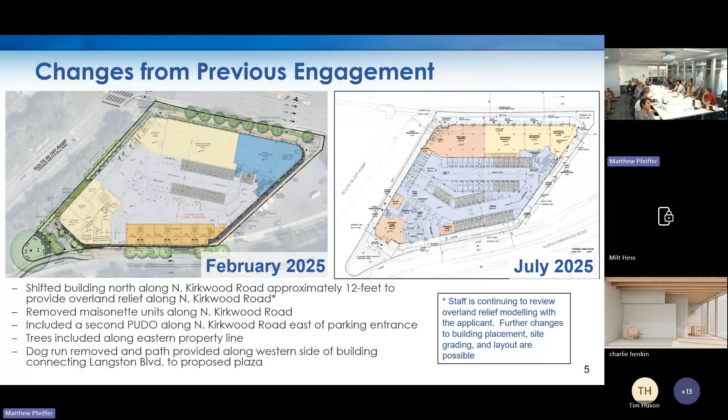But some other changes the applicant has made at this point: they've shifted the building north on Kirkwood about 12 feet to provide overland relief, removed the maisonette units as a result of that shift, and provided a second pickup drop-off lay-by area along Kirkwood Road. They've also included trees along the eastern property line with a pawn shop in response to staff comments, removed the dog run on the western side of the site, and are now providing a path that links Langston Boulevard to the proposed plaza.

The Langston Boulevard area plan was policy formation. It developed and adopted policy guidance on topics like land use, zoning, building height, building design and architecture, open space, transportation, and a variety of other topics. That is now adopted plan guidance, and now we are in the special exception site plan phase, which is implementation of that plan guidance.

In plan implementation, we are reviewing a fully engineered plan for redeveloping a site, and identifying ways in which it conforms to the guidance and ways in which it may deviate from the guidance and other applicable zoning, building code, and other things of that nature. Part of the job of SPRC is to discuss whether those deviations are appropriate or justified, and the same with zoning modifications that may be needed - do they make sense, are they consistent with policy or not.

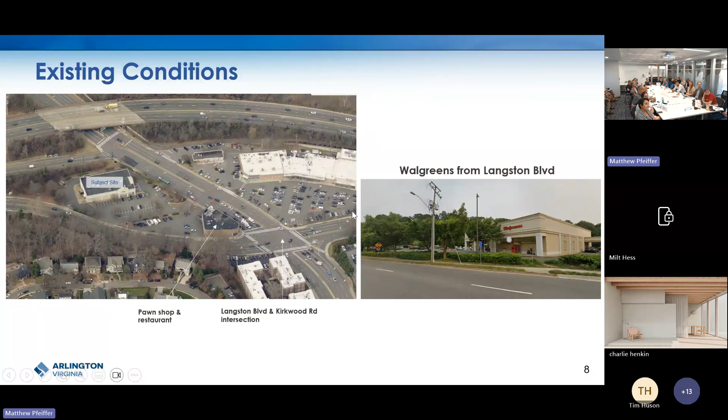Here are the statistics, which are actually updated: a total of 310 units. We've split, from our density calculation, the site into a residential site area and commercial site area. For the residential site area, under CO 2.5 zoning, they have about 185 units base density and are requesting 125 additional units. In terms of commercial density, they are meeting the 2.5, which comes out to about 8,260 square feet of retail GFA.

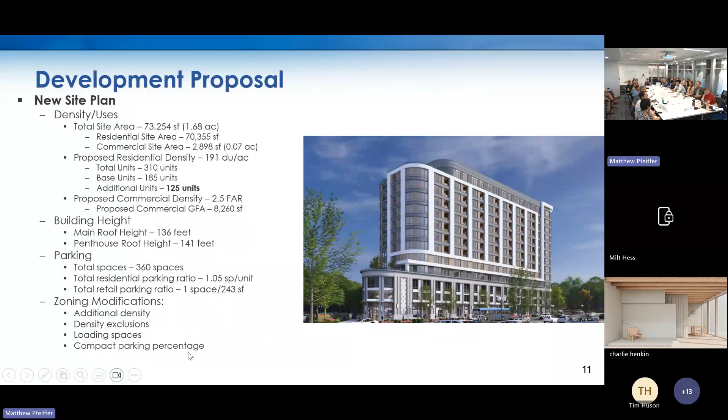The building height is 136 feet, with penthouse height at 141 feet. Penthouse roofs, as they are mechanical, do not count as building height, but we're giving you the statistic anyway. They're proposing 1.05 spaces per unit for residential parking ratio, and about 1 space per 243 square feet for retail parking ratio. They are asking for modifications for additional density exclusions and loading spaces - I have another typo, I apologize. I believe they no longer need a compact parking percentage modification, so that is a change.

So on the discussion topics, I'm going to go over some guidance from the Langston Boulevard area plan, talk about outstanding staff comments, and mention some of the feedback we heard in the online engagement.

The Langston Boulevard area plan identifies this area as a mixed-use hub, where we're expecting new high-density development. A major land use goal is to transform Langston Boulevard into a vibrant, green, multimodal Main Street corridor through expanded land use and density that will support new households, shops, and job opportunities.

The plan identifies this site as a recommended change to the GLUP to medium office apartment hotel, consistent with what the applicant has applied for. CO 2.5 is the zoning district that implements that designation, so the proposed GLUP designation and rezoning is consistent with the Langston Boulevard plan.

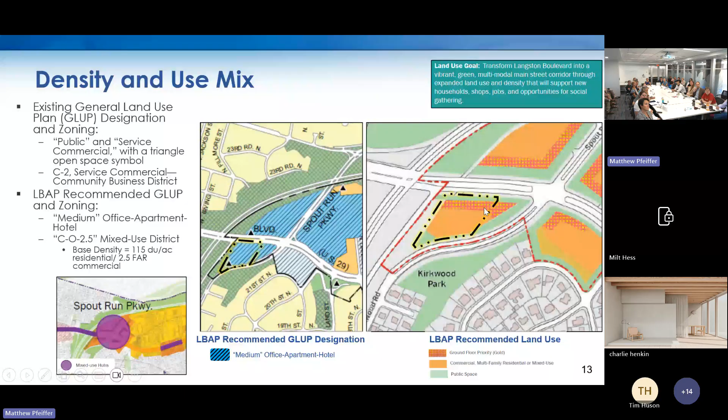In terms of specific land use, the site is recommended for mixed use with retail frontage along Langston. This graphic shows approximately the area where the applicant is proposing retail or retail-equivalent use, and they are in general conformance with the land use recommendations of the plan.

I wanted to pause there and talk about some online engagement feedback we received. SPRC members generally expressed some disappointment with the lack of consolidation with the pawn shop site. They did support ground floor retail and general support for the proposed density.

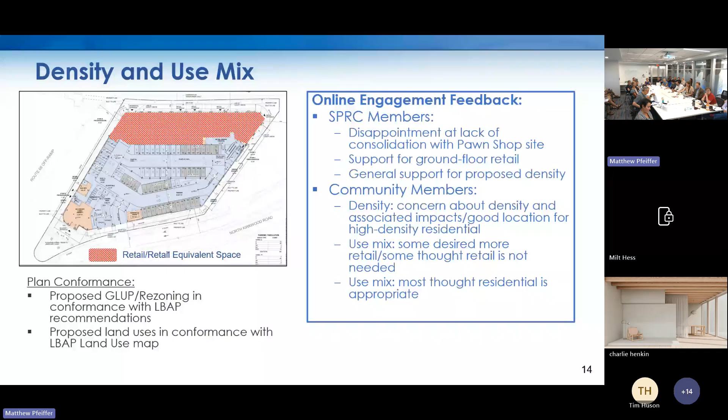Community member feedback was much more mixed. About half had concerns about the density and associated impacts, while the other half thought this was a good location for high density residential. On the use mix, some thought there should be more retail, others thought retail wasn't needed, but almost everybody thought residential was an appropriate land use here.

On site design and layout, this snippet is from the concept plan map for Area 5 West. You can see the general contemplated layout of the site here.

A note about illustrative layout drawings and sector plans generally: they represent one iteration of the possible build out of the site. They are not prescriptive. Other recommendations or guidelines in the plan are generally more prescriptive of what we're looking for in terms of guidance.

We'll look at this on the next graphic. This is generally what the applicant is proposing. In terms of some other layout features...

Their consolidation with the pawn shop site was contemplated here, but obviously that wasn't able to occur. We do have a recommendation for a plaza/park on the southern side of the site, seen here in bullet B. There's also a recommendation for a 50-foot greenway along the Kirkwood Drive frontage for overland relief, which we'll talk much more about at the next meeting.

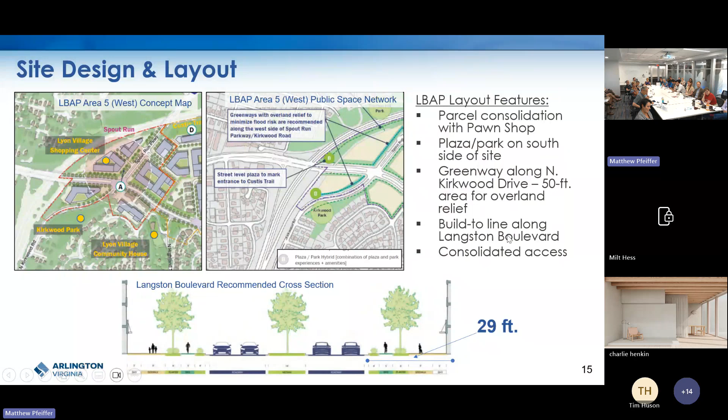There's a build-to line along Langston Boulevard which, as you can see from the recommended cross section, is about 29 feet, and recommendations for consolidated access points. This is what the applicant is proposing, generally in line with the planned contemplated build out of the site, with the exception that they were not able to consolidate the pawn shop site.

Loading and parking access are off of Kirkwood, consistent with plan guidance for these services to be located not on Langston. They do have the park on the southern side of the site, and the main building entrance, the pedestrian entrance, is off of Langston.

Going back to online engagement feedback, SPRC members generally expressed satisfaction with the proposed site layout, although we did hear that some thought the building lobby should be on North Kirkwood Road, or generally not at this corner. There was also some concern expressed about the high lot coverage.

Community members felt the site design was generally appropriate, although most felt the plaza was too small. They also thought there should be wider setbacks on Kirkwood and on the western side of the site abutting I-66. Some folks were appreciative of the pathway along the western side of the building.

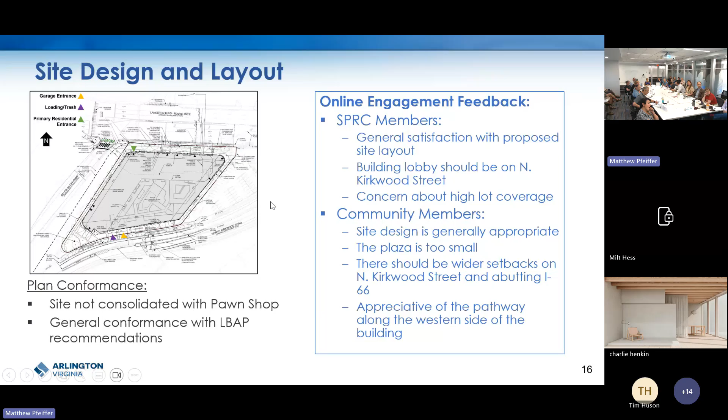There is one staff comment I wanted to raise, somewhat related to open space but also to site design. One change I mentioned is that the applicant is no longer proposing the dog run in this area, and instead they've provided a pathway along the side of the site connecting Langston Boulevard to the plaza. This consists of about a 5-foot sidewalk and a 5-foot planting strip.

We have some comments that are outstanding that we're working with the developer on, related to how comfortable and accessible this pathway will be. We are appreciative of the plantings, which do contribute to their tree canopy targets. However, we're somewhat concerned that these trees could serve to block off this pathway, and also concerned about access. There's a door access here, and just what that does to the ability of people to get through there, understanding that it's unlikely the building would be able to shift anymore.

What can we do with the space that we have? Also, is there ability to provide some more wayfinding or other visual or design cues to let people know that there is a pathway here that can get you through the block? So that's an outstanding comment that we have.

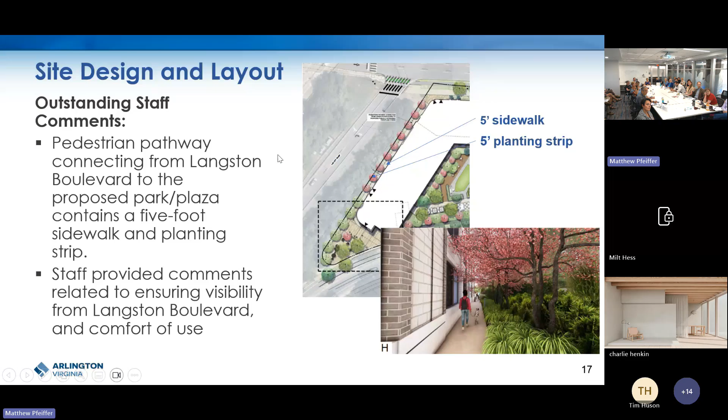The Langston Boulevard Area Plan identifies 12 stories as being up to a maximum of 136 feet. The building height guidance in the plan is somewhat nuanced in that it provides both a maximum number of stories as well as a maximum number of feet, and those two guidelines are supposed to work together. I think there is some degree of acknowledgement that there's flexibility built in for accommodating the desired mix of uses as well as specific site conditions.

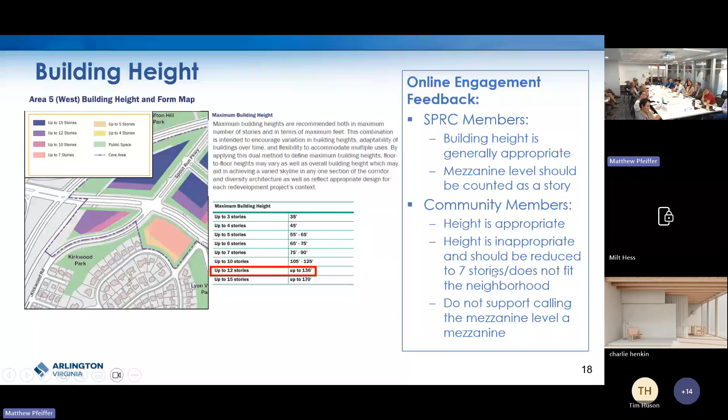Since it's on the slide, I'll mention this now. Some of the feedback we received at the online engagement relates to what I'll talk about in the next slide. The SPRC members largely felt that the building height proposed is generally appropriate, although there was a mezzanine level they felt should be counted as an extra story. The community members were much more mixed. Some felt the height was appropriate given the location. Others felt it was not appropriate and should be reduced to 7 stories, or does not fit the neighborhood. Again, we heard that folks didn't want the mezzanine level counted as a story. So let's get into that issue.

Unfortunately, our zoning ordinance does not define mezzanine or what a mezzanine is, so it's somewhat subject to interpretation. Generally, in other places, we've applied a two-thirds of the floor standard, but that's not codified anywhere in the zoning ordinance - that's just what we've done in practice. That's really been applied in Clarendon, where it's much more related to the density and how density is calculated. If we did count this as a story, which I'm not saying we are, but if we were to, this would make this a 13-story building.

As I mentioned earlier, the Langston Boulevard Area Plan height guidance recommends both the total maximum number of feet as well as stories, and those two things are supposed to work together. I will say that they are meeting the 136-foot standard, so they are in conformance with the plan guidance on the absolute number of feet in terms of height. I will also mention that if the applicant were to remove this mezzanine level completely, it would result in the loss of parking.

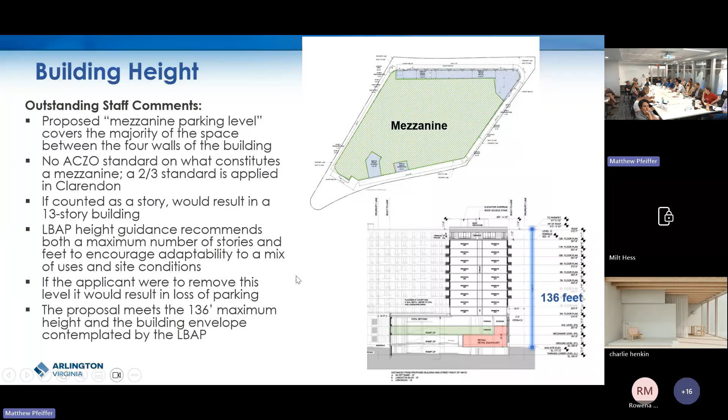So the applicant is providing a 2-foot step back above the base here. Given the width, I think the intent of having those step backs is to ensure adequate light and air access at the ground level. I think given the width of Langston Boulevard, it's not really a concern of staff at this juncture. However, I think we do want to see other solutions in terms of architectural design, materials, or sculpting elements that could be introduced to get closer to the spirit of having this facade sculpt a little bit more from Langston Boulevard.

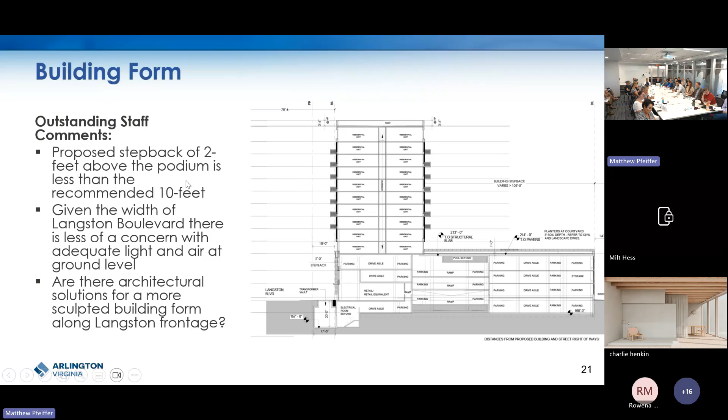I'm going to backtrack and talk about what we heard from the online engagement. The majority comment from SPRC members was just wanting a little bit more information as to what the applicant is proposing in this regard. From community members, the majority felt that the applicant should meet the required step backs and that the building is too bulky. A minority thought the step backs are fine, and some people thought they're not needed at all.

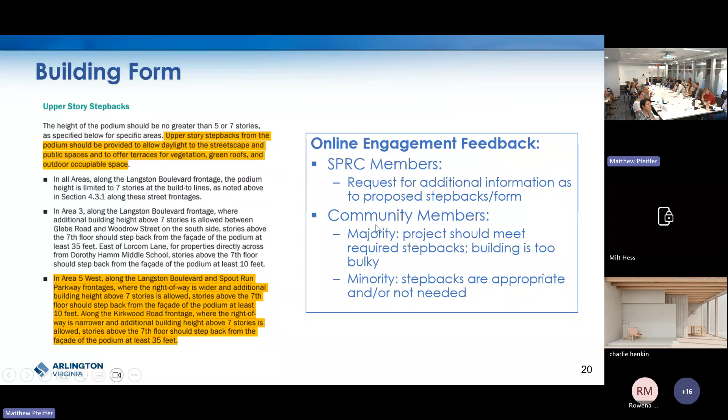Okay, architecture. So again, I've clipped some guidance here from the area plan. This has some less specific but more general guidance on good architectural design. I'm going to skip forward to an outstanding staff comment that we have. So the applicant, as a result of shifting their building 12 feet back, did have to remove those maisonette units, so we don't have those anymore along the Kirkwood Road frontage. That was one aspect of the plan that was received very positively. I think everybody liked the architecture a lot along that frontage.

So what we have now is, unfortunately, the parking garage, due to site constraints, is all along the Kirkwood frontage. So we just have some comments here. There's a high number of louvers. Again, what additional design elements or screening could be introduced to improve this facade, make it look a little bit more inviting, a little bit less like a parking garage.

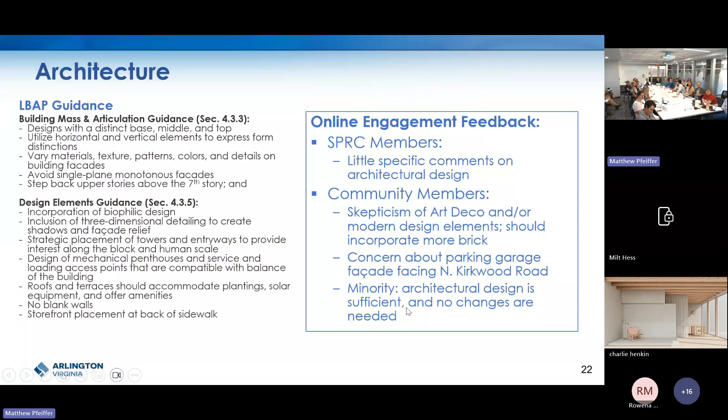When we go back and talk about online engagement, there wasn't much specific commentary from SPRC members on architectural design. Community members expressed skepticism about some of the more modern elements as well as the Art Deco elements of the design. There was some concern about the parking garage facade — and again, a typo, sorry. Back then, the parking garage was facing the eastern lot line against the pawn shop; now it is facing Kirkwood Road. A minority thought the architectural design was fine and that no changes were needed.

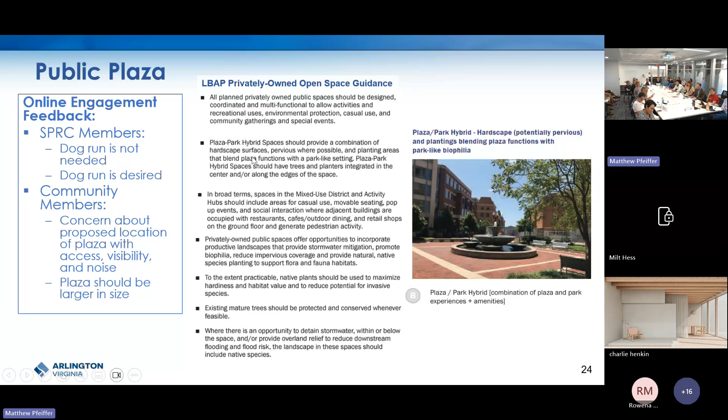So what we're really talking about here is a separate guideline from the Langston Boulevard area plan related to tree canopy. For this target, we do count trees that are maybe not on the applicant's property, but on their frontage, and also trees that are on elevated plazas.

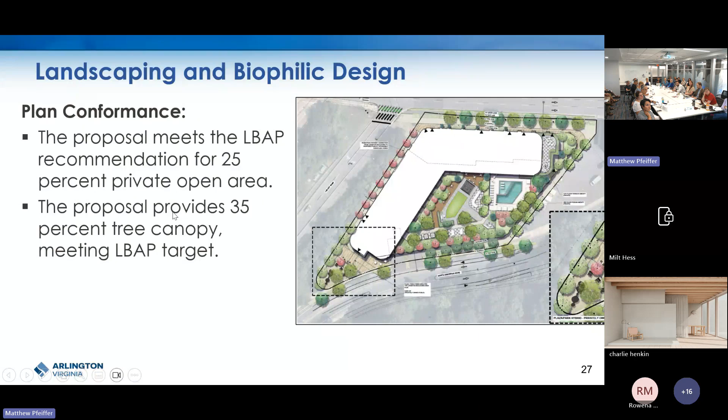So I will stop here and turn it over to the applicant.

Great, thank you, Matt. Are you going to bring up the presentation on yours, or should I? If you could share your screen, I will stop sharing. I will try that. There was a lag at Planning Commission a week or two ago, but yeah, if need be, I can pull this up.

It's happening the other day. So, let me see if I can get to... There we go. Let me go ahead and share my screen again. Last time, no. All right, I think that worked.

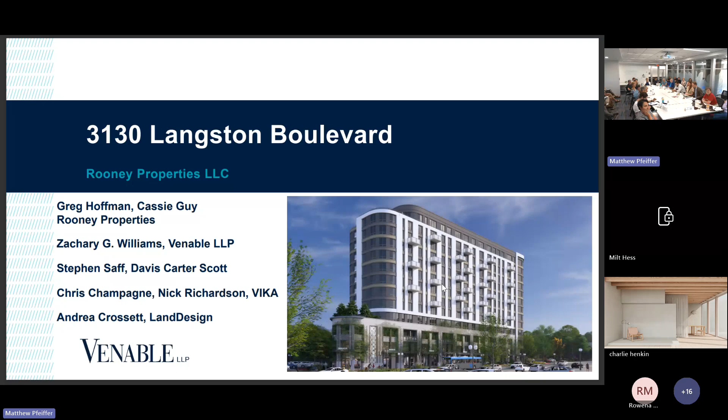I just want to mention that Steve and Andrea - that's a good point - two of our members who will be presenting tonight, Steve Saff with DCS and Andrea Crossett with LandDesign, are participating online. So they're on right now. I just want to make sure that was clear.

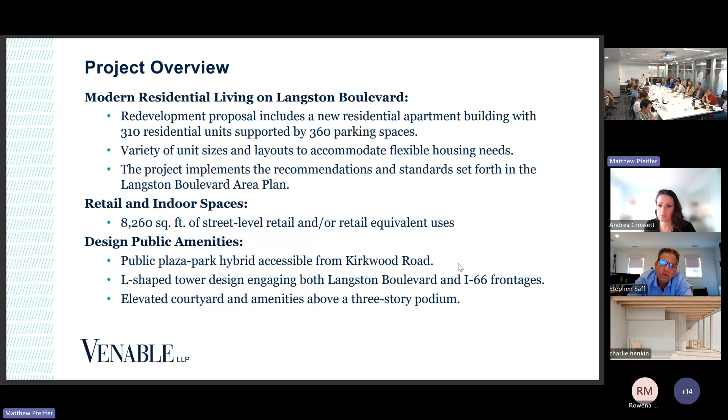So Matt did a great job with the project overview and presentation. As he mentioned, the project in its current form is proposing a new residential apartment building with 310 residential units and 360 parking spaces. The building will have a variety of unit sizes and layouts across 12 stories. Overall, the project will implement the recommendations and standards of the Langston Boulevard area plan. We'll have about a little over 8,000 square feet of street level retail or retail equivalent uses. You saw the presentation from Matt, including the public Plaza Park hybrid that will be accessible from Kirkwood Road. That is a feature shown in the plan on this site, and we will be providing that as called for.

The L-shaped tower design actually more or less follows that illustrative in the plan. We felt that was just the best way to orient the density on this particular site, closer to 66, further from the Lyon Village community. You'll also see some renderings and design details about the elevated courtyard, which you heard a little bit about, and the amenities that will be placed above a 3-story podium. Let's go to the next slide.

So as Matt mentioned, there are 3 applications associated with this project: the site plan, the rezoning, and the GLUP amendment. Those are essentially called out for and prescribed in the Langston Boulevard area plan. We're essentially following the guidance in the plan with respect to the rezoning and the GLUP amendment, and obviously we have to do a 4.1 site plan for this project as well.

Before we get into the architectural and design for the project, I wanted to touch on the fact that it's not just the last 6 months, it's actually about a year that we've been at this. We filed last August, so we're having our first SPRC here almost a year later. We've been focused on putting a lot of attention and time into our community engagement. This is the first project on Langston Boulevard, and a lot of folks are very interested in this project and want to participate in this process, so we've made sure to give folks that venue. As staff mentioned, we are bordering not 1 but 4 civic associations, and we've made sure to meet with all 4 of them multiple times, and we'll continue to do that. We've also collaborated with the Langston Boulevard Alliance, meeting with them several times, and we'll continue to closely track this project with them as well.

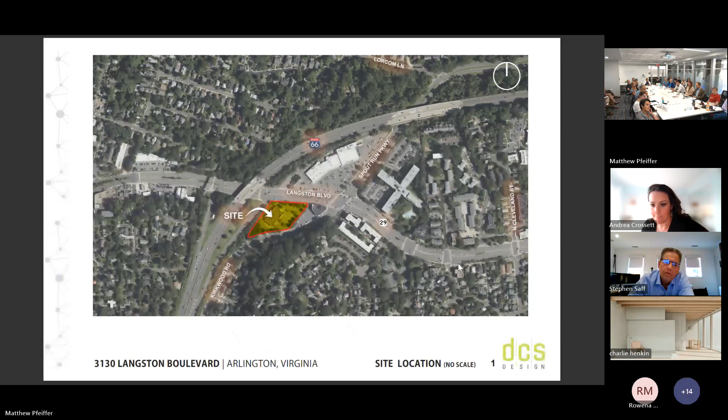Let's go to the next one. I'm going to go through these pretty quickly because Matt did a pretty good job touching on this. I think everyone knows where the project is at this point. We already talked about the plan.

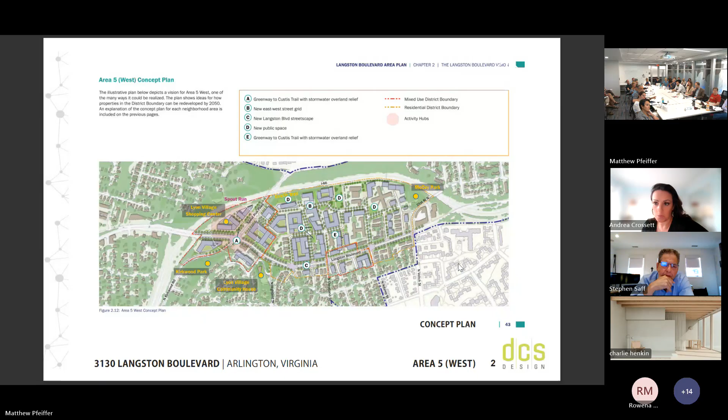We talked a little bit about the greenway that's shown along Kirkwood Road, which we're providing now with the new location of the building. We talked about height.

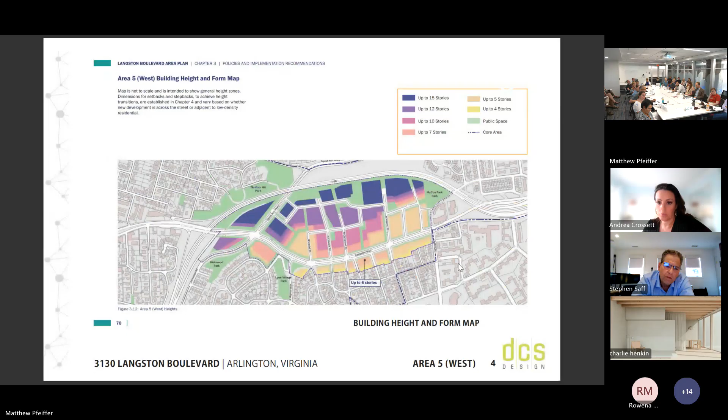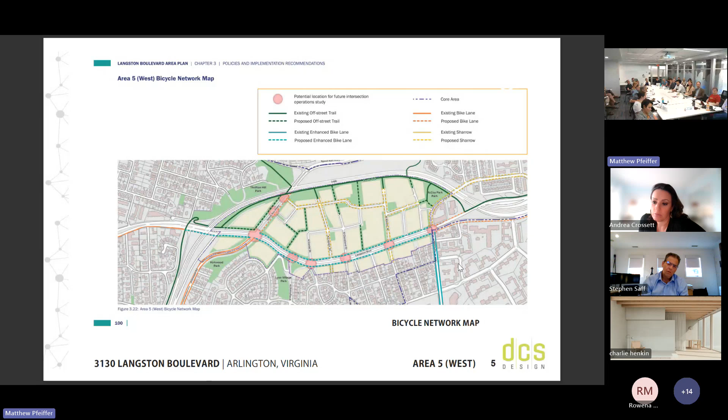I don't know if I saw this one in your presentation, Matt. I called this one out because the intersection of Langston Boulevard and Spout Run is due for a future intersection transportation analysis and study, which will be coming. We know it's an intersection that causes a lot of concern, we know the county is planning to study it, we're well aware of that, and we're all waiting for that to happen. I didn't want to be remiss not to mention it. It's top of our mind as well.

So with that, I'm going to turn it over to Stephen Saff with Davis Carter Scott to walk through the architecture project. Steve, you there? Yes, I'm here.

Good evening, I'm Steve Saff with Davis Carter Scott. I'm going to go through the slides quickly on the perspectives and plans, and then Andrea Crossett will go over the ground plane, the elevated courtyard, and the roof deck and anything related to landscape.

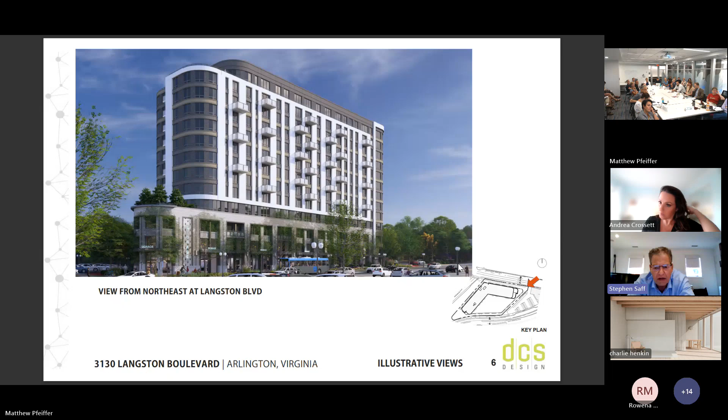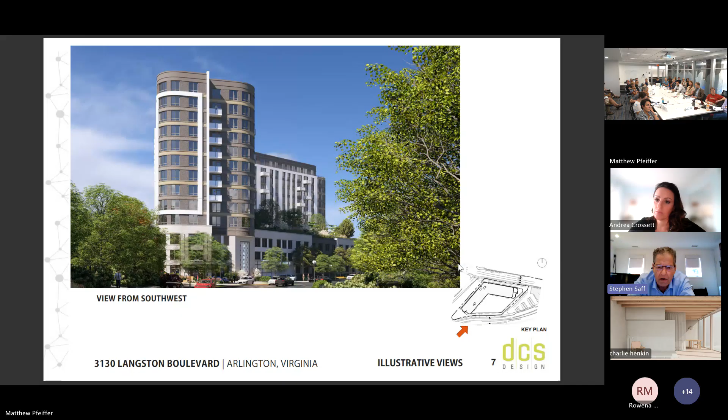This is looking from North Kirkwood, looking north, and you're looking at the secondary lobby. It's called a secondary lobby, but I think it will be as important as the northern lobby at the northeast corner. It will be used equally as much, if not more so. So the north lobby would be more of a formal lobby, and this will be more of a passively and actively used lobby to get out to the adjoining area.

This is looking from the northeast corner, looking across the pawn shop and the 3130 Langston project.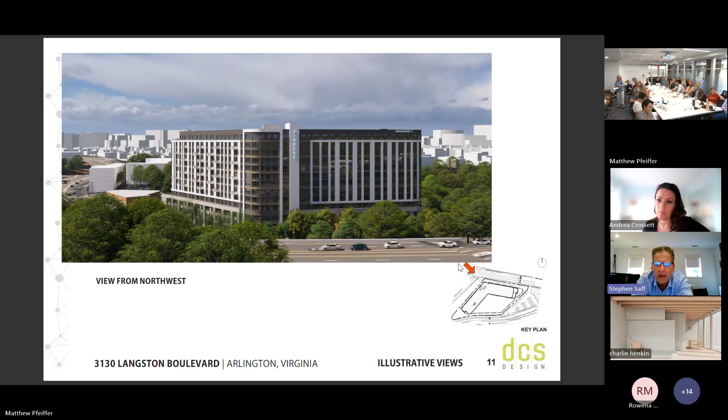Just moving a little bit more around, looking a little bit more to the south from the north. And the architecture with the strong verticals at that corner and the difference in treatment fortifies, strengthens the lobby entrance.

The lobby entrance, I know, has been a point of contention where it is, but given the geometry of the site and the fact that the elevators really need to go in that area, and we gave importance to the retail over on the northeast corner, that's how that lobby location ended up being. We did a lot of studies to look at different locations for the lobby, but we do have two lobbies on this project.

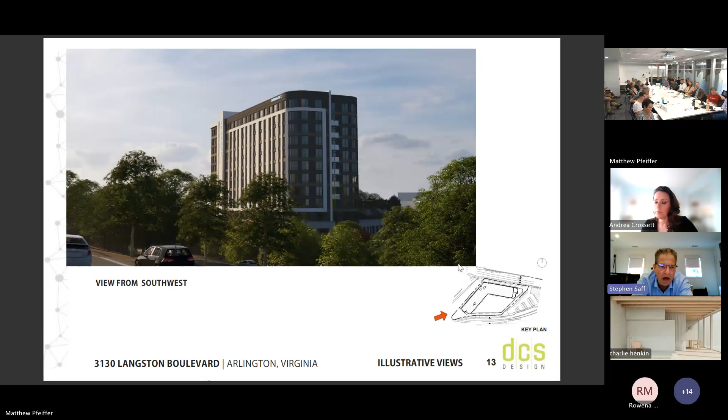This is looking from I-66 as you're heading into DC on the inbound lane.

And this is just up high over, looking from south to north over the whole site.

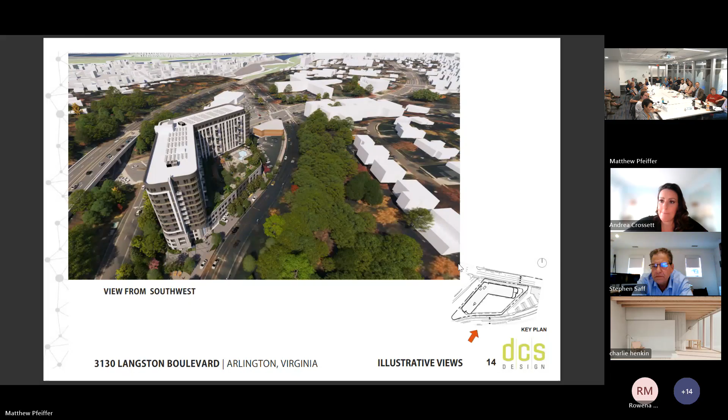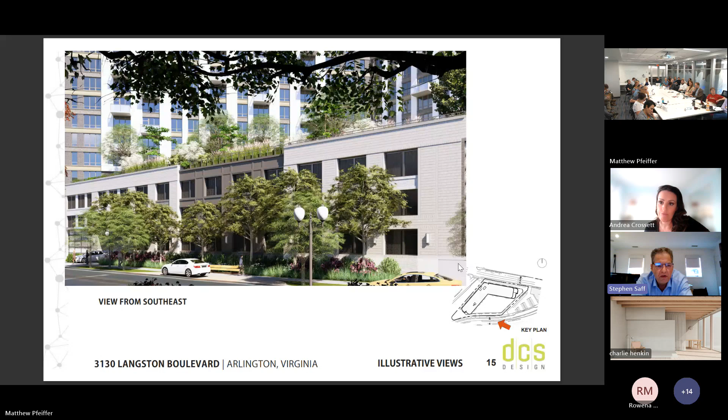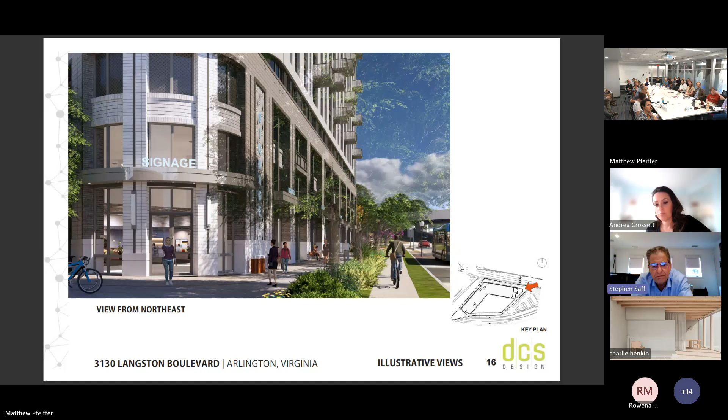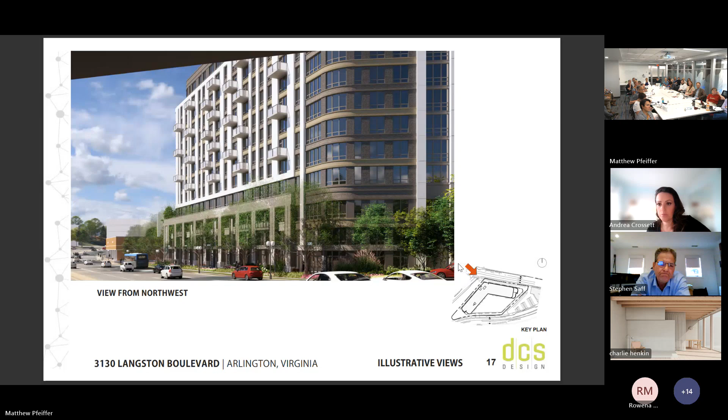We did extensive studies looking at how we could separate the two. We looked at a lot of different configurations here, but given the grade of the site, the parking layout, and the fact that there's never a good location for loading docks and garage entrances, this is our best foot forward of where those entrances into the garage ended up being.

One of the changes we were also able to do is make a larger lobby and activate that park at the south corner of the building.

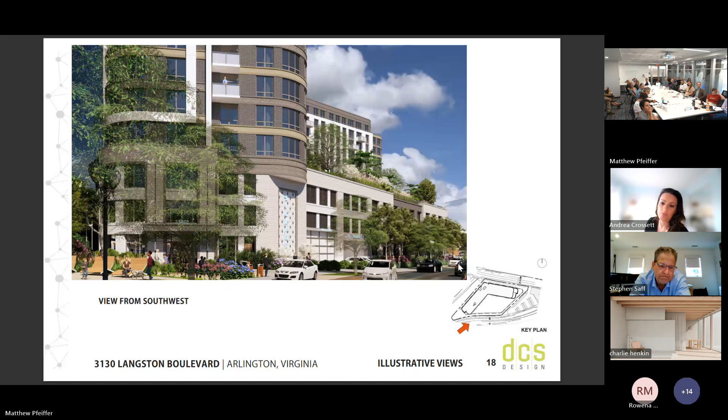And this is just looking at the elevated courtyard, which again, Andrea will talk about, along with all the other biophilia study design and landscape work.

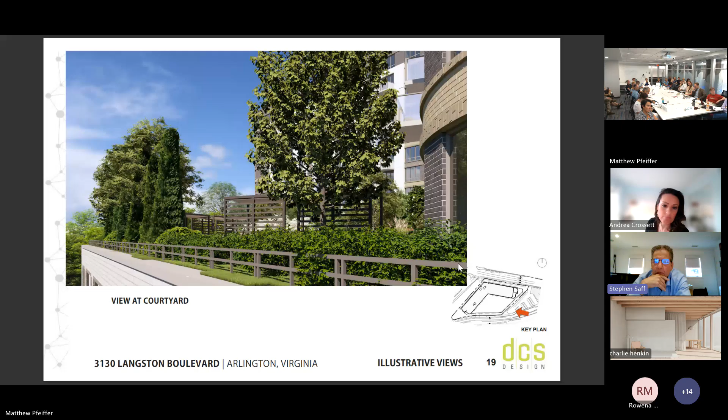Let's get through this a little bit faster. This is just the main lobby entrance along North Kirkwood.

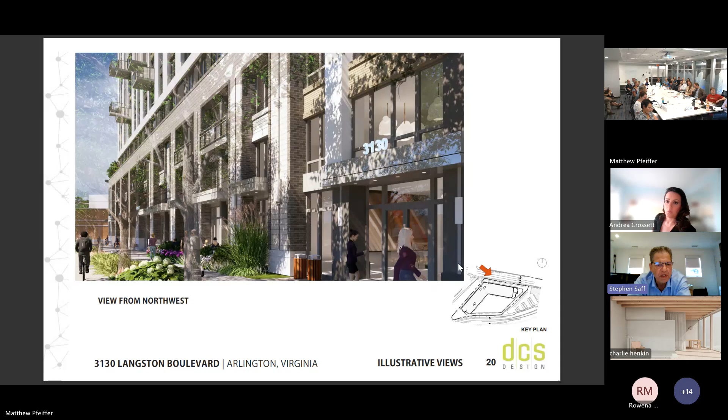And really quickly, this is below grade parking. The ground level: the orange is the residential amenities and lobby areas, the yellow represents the retail equivalent spaces, and the blue is the parking.

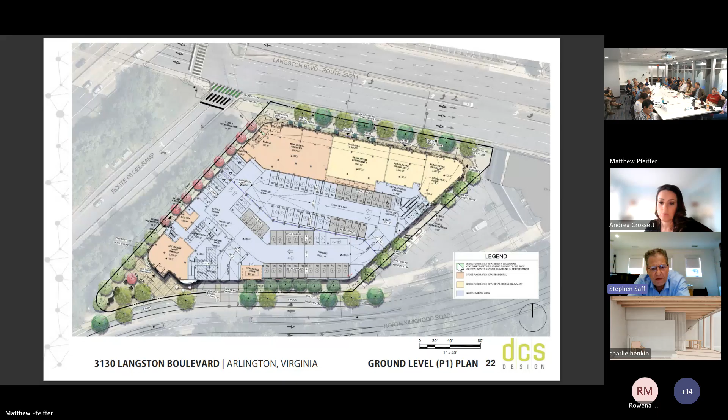The next level, parking above. One more level. And then we get to the elevated courtyard and residential and amenities at this level.

Typical floor plan. And then the last slide should be the top floor with the deck and amenities area at the very east corner of the site of the building. The building is pulled back about 25 feet at that corner, stepping the building back.

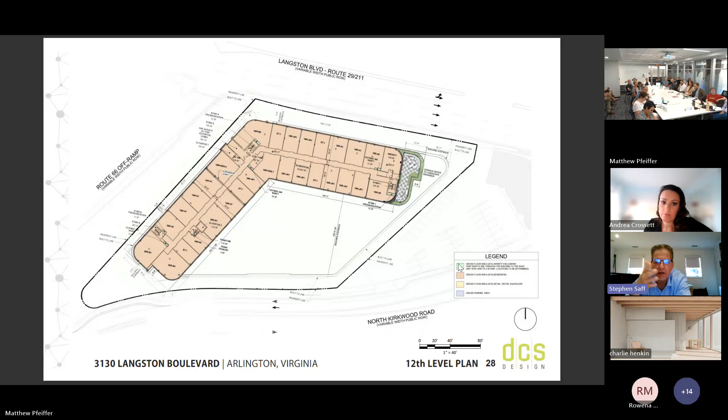This is an important section just to give you an idea of the sections through the site. You have section A running from east to west — look at section AA, and at the bottom, number 1 gives you the cross section through the site, the building and adjacent buildings. Section BB runs somewhat north-south, going through the shopping center on the north side of Langston Boulevard, and then the residence on the hill to the south.

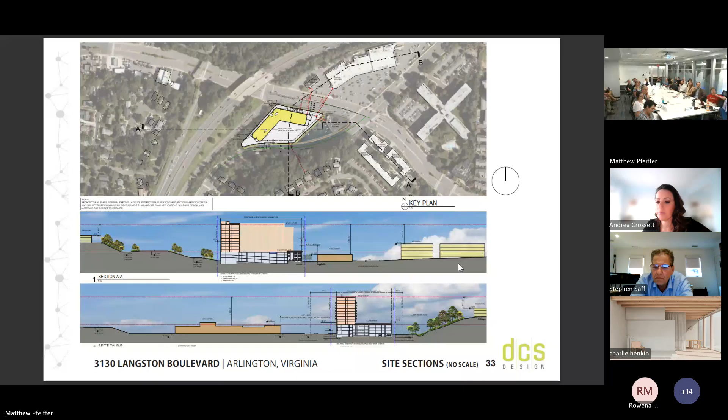I'll be happy to, after we're over, answer any other questions, architecture related.

Andrea? Okay. Thank you. Thanks, Steve.

I'm Andrea Crossett. I am with Land Design. I'm going to be presenting for JJ Montefiore, who's sitting beside Cassie. He'll be there to answer questions, as I will have to hop off after the presentation. To go quick, and as Zach said, Matt, you did such a great job running through — I will continue to go as quick as possible. I just want to mention, you can see here, just looking at the plan, the 35% is something that we strive hard to meet. It is a really tough requirement.

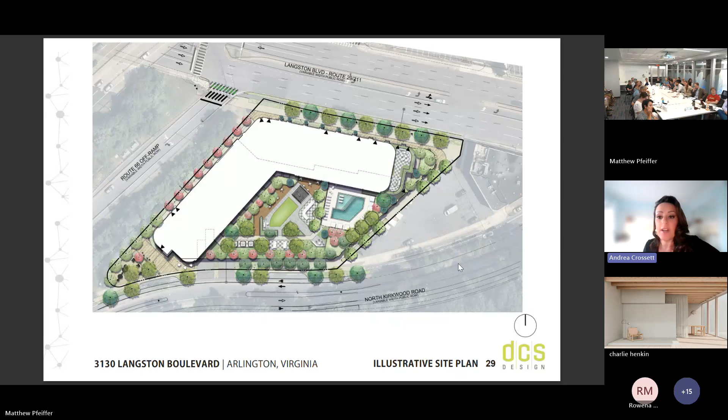We can do the next slide, Matt. Okay, I'm going to go through these quickly. And again, I guess not starting counterclockwise, but the other side.

So this is the Plaza Park hybrid space. We'll just keep running through. And this is that corner - this is the slide that you saw with Steve. That's the top corner there. You can see the 66 there in the background along Langston Boulevard. Next slide.

That's another one - as you continue down Langston Boulevard, that's the nice 9-foot sidewalk. As you continue down, you can see the 66 overpass in the background there.

This was the slide that Matt showed, and again it's shown pretty lush - these are illustrative purposes only, but we're going to be working with staff on this. We do think it's nice to have that connection between Langston Boulevard and down to that Plaza Park hybrid space. Next slide.

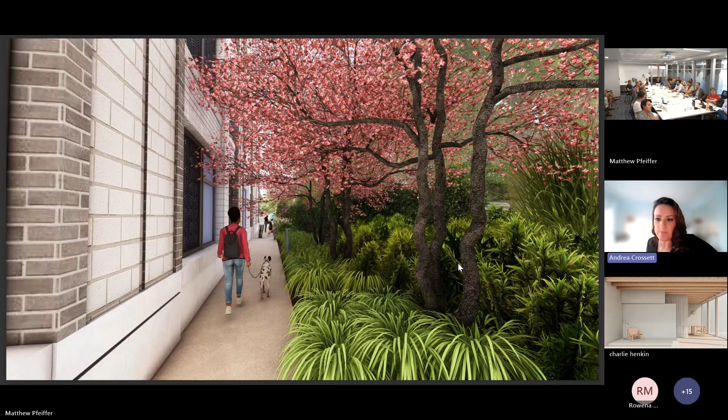Coming back into that plaza space - I just want to state again that we have to make sure there's a plaza space. They want to make sure you have some area if you want more of a plaza type - it can't just be a sidewalk, it has to be more of a 50-50 space. So you have to have a wide enough space for seating and gathering, and you can see the overlay string lights above to make it feel like an actual plaza space. Next slide.

This is that Kirkwood side with the overland relief. Pulling the building back did give us that opportunity to get some more streetscape, more landscaping there, the double row of trees along Kirkwood road. Next slide.

This is another view further down the road, just showing the sidewalks, some benches, and again giving that really lush landscape in the overland relief. Next slide. Same view, just the other side. Next slide.

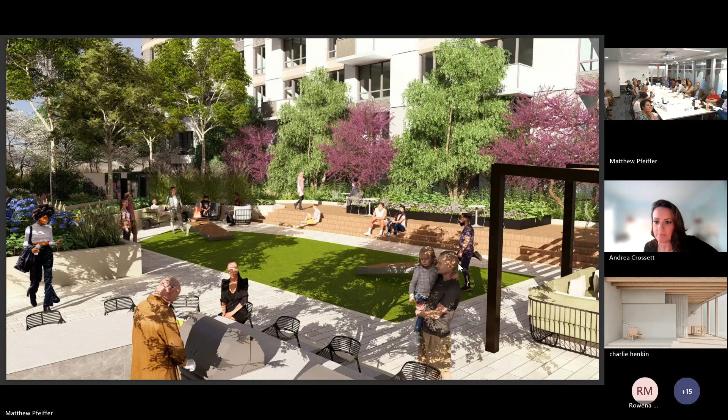And one thing, this is up on that 3rd floor podium that Steve mentioned. And you mentioned this too, Matt, where we're able to provide some trees up here. It's on the 3rd floor.

Some of the things that we're including up on this podium: we have the pool, obviously, we have some gaming tables, grill stations, a nice pergola, a shady deck area, fire features, and a multi-purpose lawn. We're just trying to make sure it's activated enough, but the trees and the pergola also provide some shade and privacy.

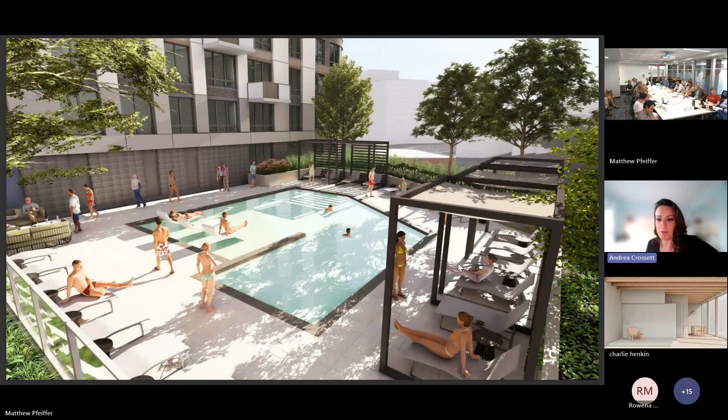Next slide. And that's another view of the pool and those pergolas. Next slide.

And this is the 12th floor terrace, I think that was one of the last slides that Steve showed. It's kind of just a private space again, similar to the 3rd floor. It's going to be on the 12th floor, up at the very tippy top, and it's very small, but I think it's going to be a nice intimate space for the residents. Next slide. That's it for landscape.

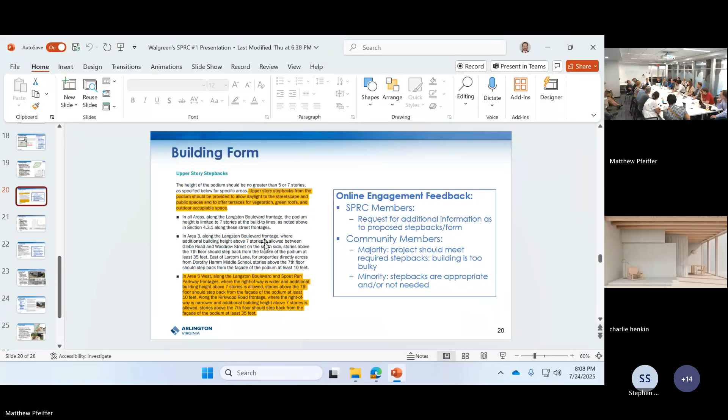So are they meeting it? They are meeting it on Kirkwood. They are not meeting it on Langston. I will show you. They're providing a 2-foot step back along Langston instead of 10.

Can you describe what that setback is? Yeah, we'll get to you. If you would like to make public comment or follow up with questions, sign up for that. I did. Okay, very good. Thank you, just keep those and we'll get answers.

You mentioned earlier that the 35% tree canopy can count trees along the frontage, but does that mean the trees between the site and I-66 are counted or not? The VDOT trees? No, because they've not planted those trees. Okay, those are existing. No.

There was a comment about the mezzanine level, that if it was removed you would lose parking. My understanding of the height issue is not to remove the mezzanine level particularly—if you're removing anything, it's a story, not necessarily the mezzanine level. What else, other than parking, occupies that? Just parking. It's just parking.

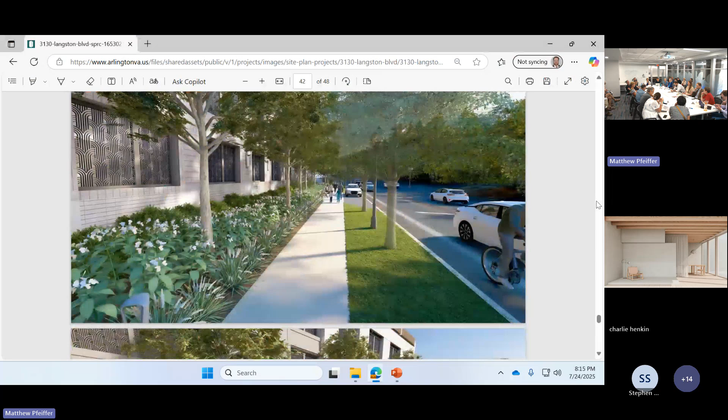So the 30-some-odd retail spaces are all in the parking garage—the street parking, like parallel parking, is associated with this, right? We have a lay-by area for pickup and drop-off. Okay, and that's on Kirkwood? Kirkwood. Okay, and the entrance to the parking garage and egress from the parking garage is also on Kirkwood, correct? Okay, the other questions I have will be for the next meeting.

Thank you, I just have a clarification on the mezzanine level comment. If we can pull up the floor plan again, I thought the mezzanine level had parking as well as the second story portion of retail in front, so it's not just...

But that's not actually part of the mezzanine level because that's open to below. Sure, but geographically speaking, when we're thinking of it, still... But it's not GFA, is what I'm saying, it's like air. Okay.

So the retail below it is a two—for a portion, you can see outlined in the pink right here, so this is the retail, and then for this portion it's got a double-height ceiling, so it's not just a parking floor. If you're slicing it like a pie or a cake, even though it doesn't count as GFA, it's still due for consideration.

Jackie: What is the percentage of permeable and impermeable space on the park/plaza? We were about 50/50, I can get that number for you though, since we have the park basically split.

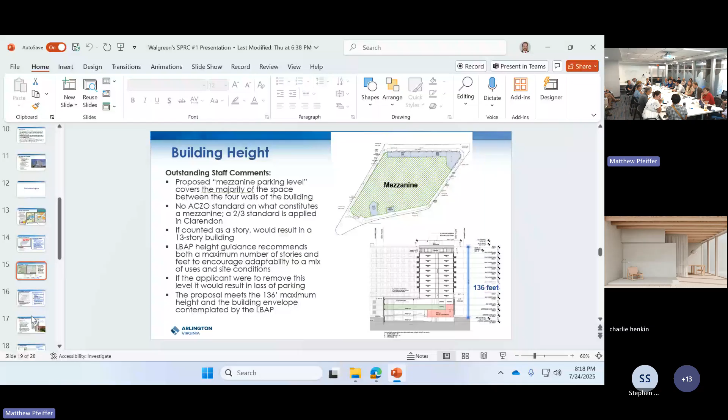The second question was about the step back. I know you're not meeting the step back, and I wanted to understand the rationale, since we have a very recent area plan that calls for it. The guidelines were for sunlight, and maybe that isn't as much of an issue, but it was also for biophilia and outdoor space for people. So I want to understand why you're not doing the recommended step back.

I can start on that. The step back was a controversial issue while the plan was being reviewed, and part of the reason is actually illustrated on this site. We have a pretty skinny building, so when you step back 10 feet on the tower, you're affecting all of your corridors, all of your units, and the building would have to change. We'd have to move the density in a different direction.

Closer to the Lyon Village community, it would really change things — the design as you see it wouldn't work. I'm certainly not a structural engineer or architect, and Steve or someone else can step in, but that's the primary reason we're not doing it: we're pushing all of our density to the edge of the site, along 66, and it's a pretty narrow tower. That's why we're not stepping back any further. We really can't.

My third question: I'm interested in the location of your lobby on Langston Boulevard and how you think that will impact pickup, drop-off, and deliveries. It's a pretty busy area in the mornings and evenings — there's an on-ramp and off-ramp right there. So I could see traffic issues and backing up. Why not have the main lobby entrance, and where people's GPS takes them, be on Kirkwood?

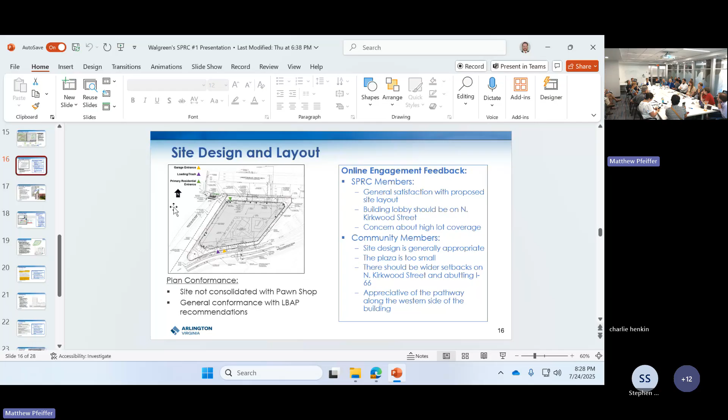And even on the original documents we had, it said 296, not 310. It seems to us that a change of maybe 20 units to get those step backs, reduce the parking needs, and give a little more space for some of these other requirements would be absolutely worth looking at, and we would advocate for that.

Tony, did you have anything? No.

The question is, with that pawn shop, if that's redeveloped, what are the restrictions on that site itself? And the corollary is, what kind of constraints deal with stormwater, which will be next time. That wasn't in the Langston Boulevard plan, so what could happen there? Maybe the follow-up to what Jackie said is, what would this building have looked like if they would have been able to combine it with the pawn shop? Would it have been more units, or just expanded out with more setbacks but the same number of units?

I can answer what the plan guidance is for the pawn shop site. As far as the other question, I'd look to the applicant. Really it would be the same guidance that applies to this site, only I think the height steps down closer to the intersection of Kirkwood and Langston. I think it's down to 10 stories rather than 12, so they could put a 10-story building there.

Following up, I had the same question. I'm wondering, because that site also has a gigantic stormwater pipe underneath it that's been restrictive. So even if it technically says it could be 10 stories, is it even possible to build 10 stories there, given that they can't go down where the pipe is or build over it? That constrains the site even further, so it almost makes the pawn shop site undevelopable.

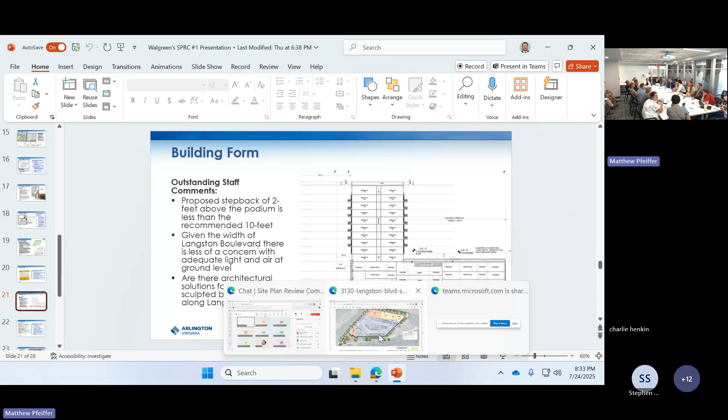Thank you. I've got a question about the retail space. Can you tell us how many retail units this is going to accommodate and the size of them? The reason I'm asking is I know you don't know who the retail tenants will be yet, but it may be helpful for us to have an idea of what types of retail may go in there based on the numbers and spaces. I ask that because I think it will inform later discussions concerning traffic and parking, if we knew what kind of retail could conceivably go in there. Sure.

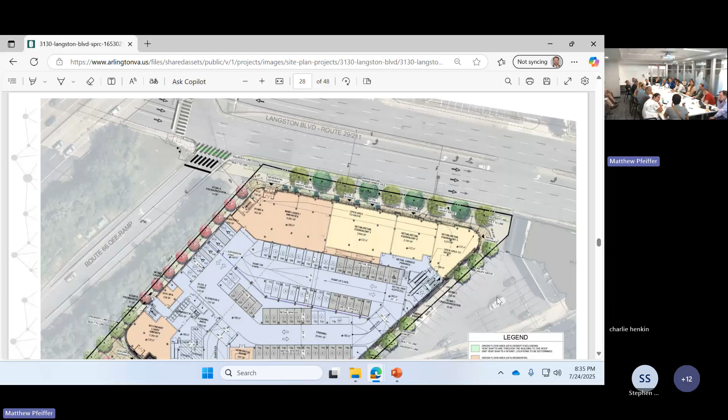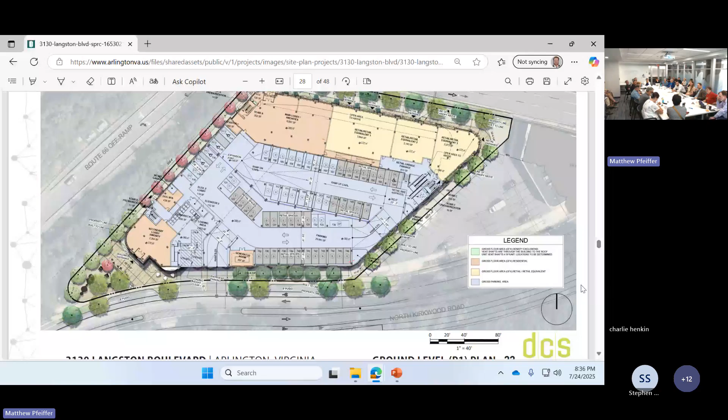So I thought your landscaping and the biophilia around your building is really beautiful. I was wondering how enforceable that is from a site plan condition. We've had developers show us big, beautiful trees on top of the building, and then we find out that's actually not possible to put there. So when you have the tree plantings plan at this point, how do we make sure we get those pictures that look so beautiful? Because I think it really would be a gem to have all of that. Good, thank you.

So the short answer, Tinley, is that trees shown on the conceptual landscape plan have to be shown on the final landscape plan. There is some flexibility in terms of tree location, but major statistics like the number of trees, especially public trees, and whether they're canopy trees, the type - that's shown on the conceptual landscape plan and has to be part of the final landscape plan.

Something I find interesting, or recently learned, is that the renderings and plans show trees as full grown, what they would look like full grown. But when they get planted, they often are not. So when I held that up, I was like, guys, are we being honest here? But we are, because the plan actually requires us to show them as full grown trees, though what gets planted isn't always that. So there is that discrepancy where sometimes people are like, wait, where's my 20-year oak tree? And it's like, it's a baby and it's going to grow there eventually. There's something nice about that too - we're building for the future, we're building for the long term.

So I think the park is placed where it is largely because the area plan said it should be there. What would have to be true for it to be attractive to move it somewhere else that's a little less hidden?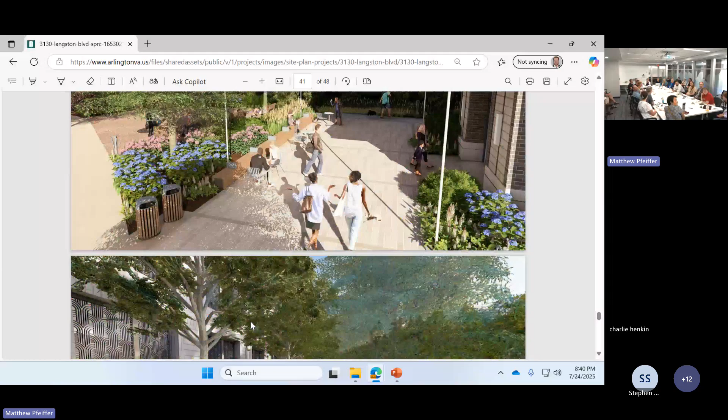Just another comment - in your picture of the little plaza, you had some kids there. I'm worried about the kids and that parking garage situation, hoping there's some solution, like a tot lot if you're expecting children, in an area where there's a lot of traffic. I think that's the intent of the park, on the edge, away from that furthest most.

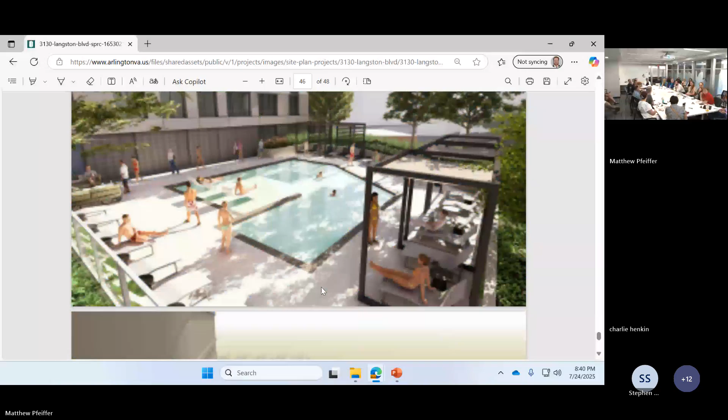Is there a pedestrian entrance there? I see the pedestrian entrance is right next to the parking garage entrance. Does that lead to the park? Yeah, like if you're a family with a stroller, can you get from the sidewalk without going near the parking? Yes, you can get through it along Kirkwood, and there's another path. I think that was part of the connectivity question.

Can I just do my whole list now? Okay.

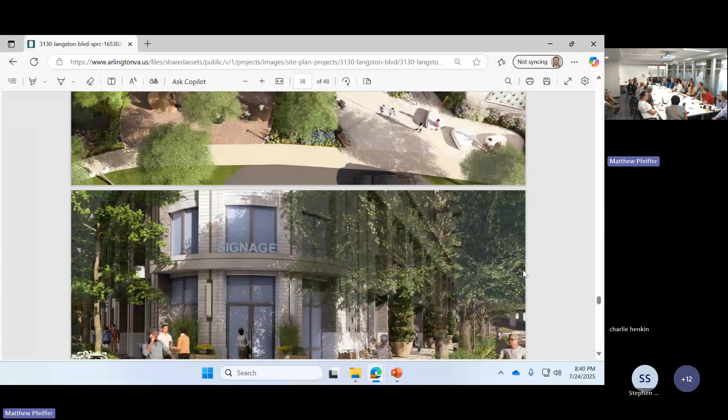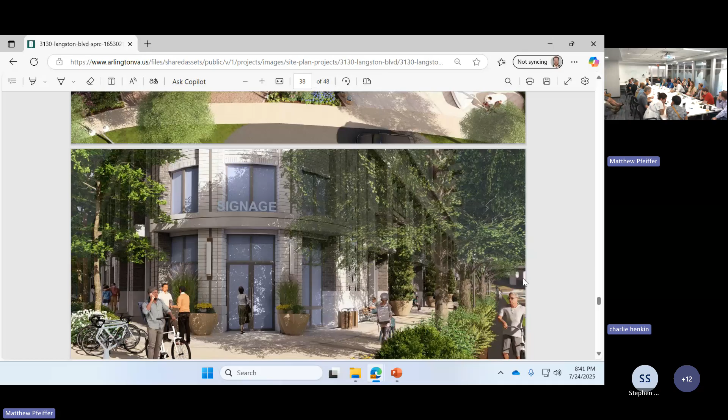I'm really very interested in the trees between your property and VDOT. They are full of invasive plants and VDOT needs to take care of them, but you guys could do a lot to influence VDOT to do that, and we really encourage you to do that. It would make that little pathway that now is kind of cramped feel much more open. You might even be able to influence them to put an attractive fence, or you guys could do an attractive fence, because it's a big problem in our whole county about invasive plants.

I want to echo the staff's comment about the entrance on the little plaza, that it should be a lot more integrated, and echo the comment about there being as much permeable treatment as possible. I think I'm getting through all the maintenance plan - especially we really want you to have a plan so that's part of the site. Okay, I think that's it.

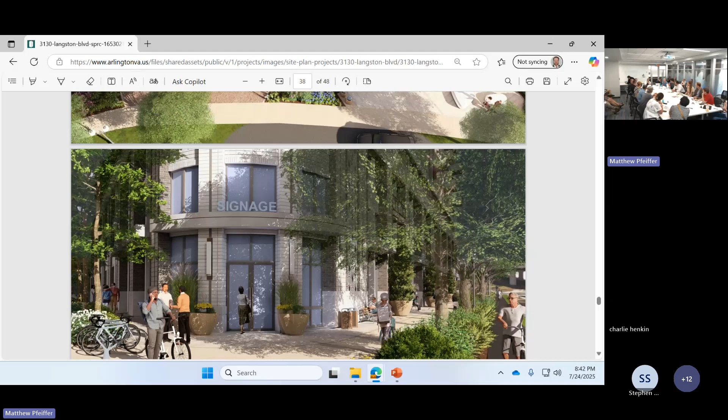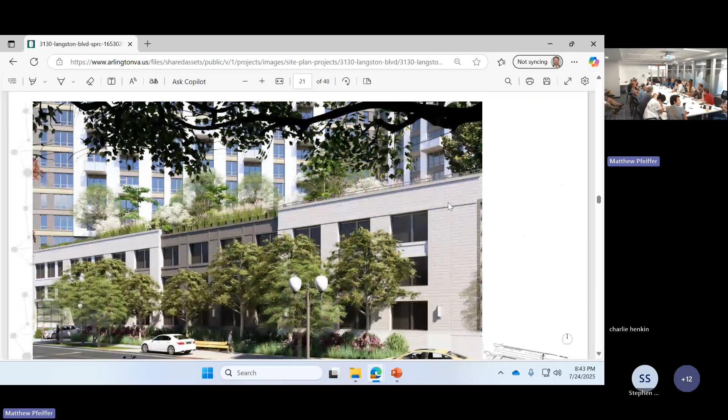Yeah, that's a great comment. A couple things - first off, the facade on Kirkwood, I'd like to see something a bit more. Right now it's garage-like. You've already started moving that direction by breaking it up with different materials, which is great, but I can't really offer ideas unless you can make it a bit more biophilic. We've had a couple recent SPRCs where we've done some really interesting screening for parking garages that are biophilic. If you could do something like that, it would help - right now it's still a little too garage-ish. In the county overall, we really don't like garages facing a main street, so flag that if something can be done there.

I'm very happy to hear you're looking to have the address change to Kirkwood - I think that'd be great. What I'd really like to see, and I understand why you need the two lobbies, I have no concern about that, but if the Langston lobby could be the tenant lobby and the public lobby is the Kirkwood one, where the pickup/drop-off is, where guests come - essentially the Langston would just be a key card entrance for tenants to come in and out. I was in a building like that in Philadelphia - there were two lobbies at totally different ends of the building. One was totally for the tenants, you needed a key card to use it. The other was where packages got dropped off and the Lyfts and Ubers dropped off - everything was right there at that second lobby, right next to the loading dock, and it didn't bother anybody.

And it was an apartment where the rents were pretty good, pretty high. So it's doable—it doesn't harm the renting of it. But anyway, I'd like to see that emphasis.

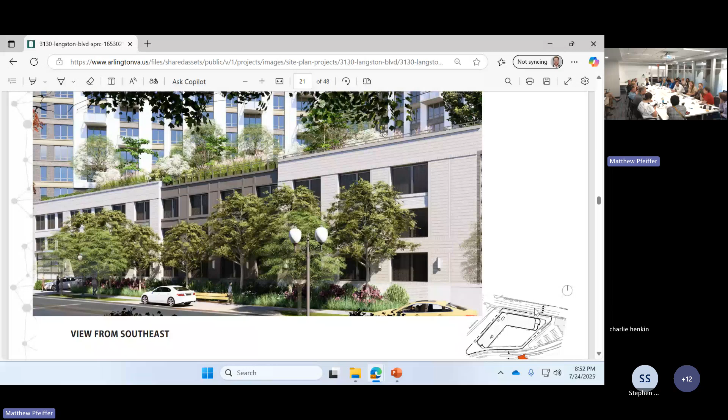Thank you. Just following on a lot of what Bob said, I also don't see a really defined use for that plaza. Think of it more as a forest-type environment, not a lot of hardscape, and use permeable surfaces as much as possible. Also, maybe update some of those landscaping photos, because they look pretty generic, and from my eye most of them don't look like native plants. Be more specific on the mezzanine level too, because I'm pretty sure you can't plant an oak tree up there—it'll probably have to be understory trees and things like that. So just don't set the expectations higher than whatever the actual canopy coverage you get from that is.

In the LEED scorecard it noted a reduction in the urban heat island effect. It would be helpful to get a bit more of a sense of what that actually translates into, between the tree canopy coverage and the materials you're using.

Finally, dig a bit more into the building design itself, in terms of what materials you're using. How are you taking advantage of the position and direction of the sun to maximize solar gain and reduce excess heat on the western side during late afternoon? Also, what materials are you selecting—low carbon cement, steel, other materials—that might lower embodied carbon, or in some cases even count as a negative investment? Really think about doing a life cycle carbon assessment and drill into that in more detail, in terms of how you can maximize or at least minimize the carbon impact of the building itself.

I have two questions. My turn.

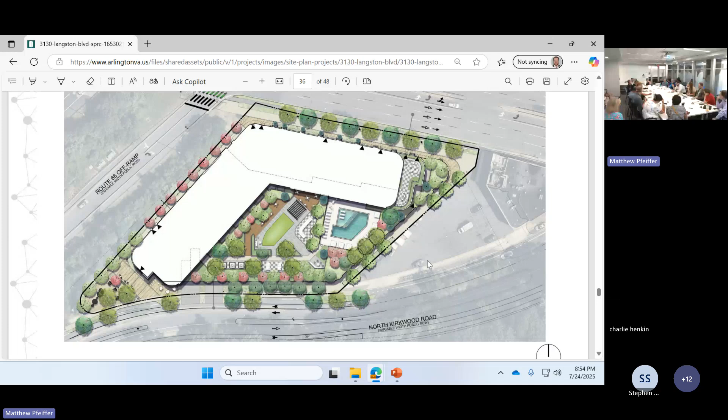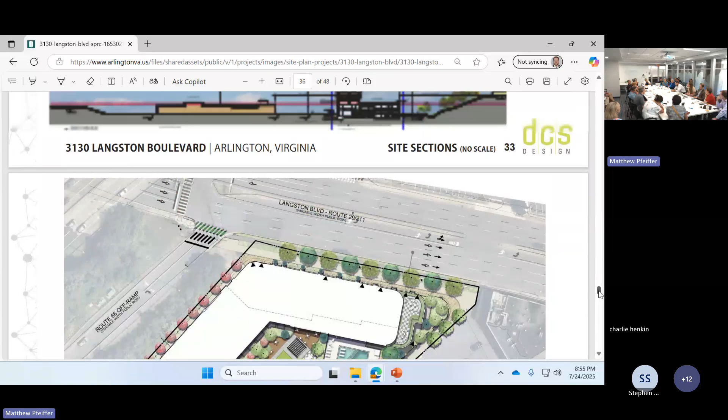Another question, and I think it goes to architecture maybe, is will there be any soundproofing or anything, or are you using any sort of sound minimizing things especially along the 66 area? Our building materials will be glass, insulation, all that along 66 will be a higher rating.

Yeah, first I just want to add to what you just said about the soundproofing. The other thing we mentioned at the past meeting was downlighting that does not go directly out, particularly with those elevations that you showed, like that one. Downlighting that's not going to make the backyards of all those houses daylight all night.

You don't want a spotlight, Jackie? I can get you a spotlight.

But the main thing I wanted to do was, I talked about density and height before, and I wanted to support everything that Bob and Joan said with respect to the park, that I prefer to call a park area rather than a park plaza area. I agree it's not big enough for the kind of plaza people are talking about events in, but it is big enough to have a lot more shade, particularly if you're expecting people to be walking back and forth to the metro. A place to sit down in the shade is going to be really important. If that was all permeable and focused on shade trees, I think it would be a very inviting spot. Yes, you'd have to walk a half a block down to Langston to get there, but it would be absolutely worth it.

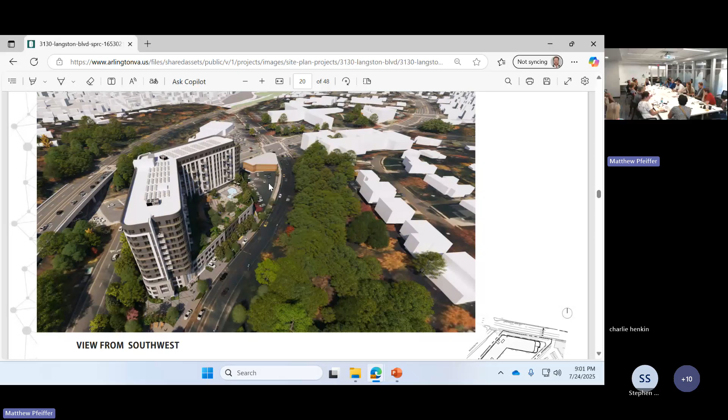Would you like to set a timer? Two minutes, you got two minutes. How many do we have? Four here. I can pull up the timer here so everyone can see it.

All right, so the first one is Steve. Hold on, let's get the timer up first. There we go - using this time to get extra time. Thank you for your patience. Two minutes. Can you stop watching? Maybe a stopwatch is better. Yeah, there we go. There you go, Ms. Campbell.

Okay, so I don't have comments, I have questions. My question is about parking. Is there the idea that you all are going to request to reduce the number of parking spots? Is that part of your plan coming forward? Did someone answer that question? Yes, I think there are aspects of it that we're going to be reducing. Okay, and what are those aspects? And is there going to be parking, one spot for each unit?

Plus some for the businesses - there's more than one spot per unit now, plus the businesses, the 34 or whatever that you have for the... correct, I don't think we anticipate it dropping below that. Yeah, and I'm sorry, I think we were talking about this earlier - we don't have a reduction or an ask with the compact spaces anymore. So I think we are meeting all the parking requirements. I actually think we're above the minimum. Okay, sorry, it took me a second to think through that.